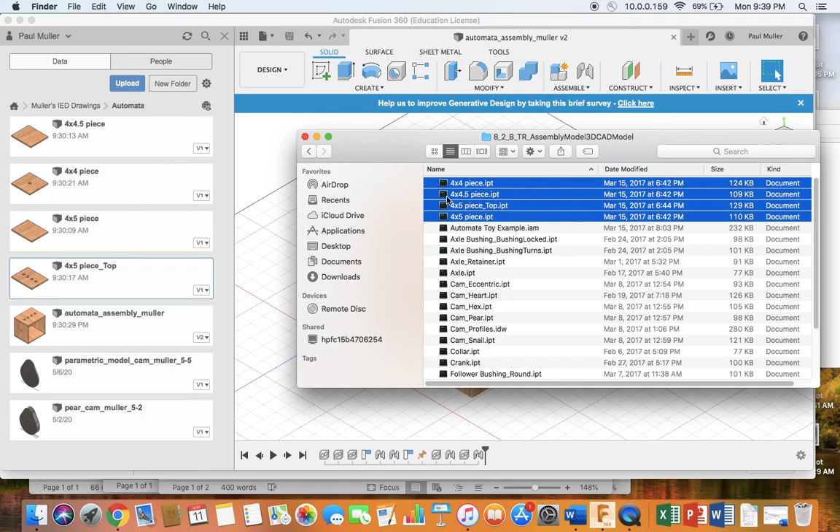Let's go back to Fusion 360. Once you've downloaded the 4 parts of the box, then you need to upload them by grabbing them from wherever they are, like here. I highlighted them all at once, and I clicked on upload. Then I dragged my files into this box. I selected the files, put them into my automata directory, and said upload.

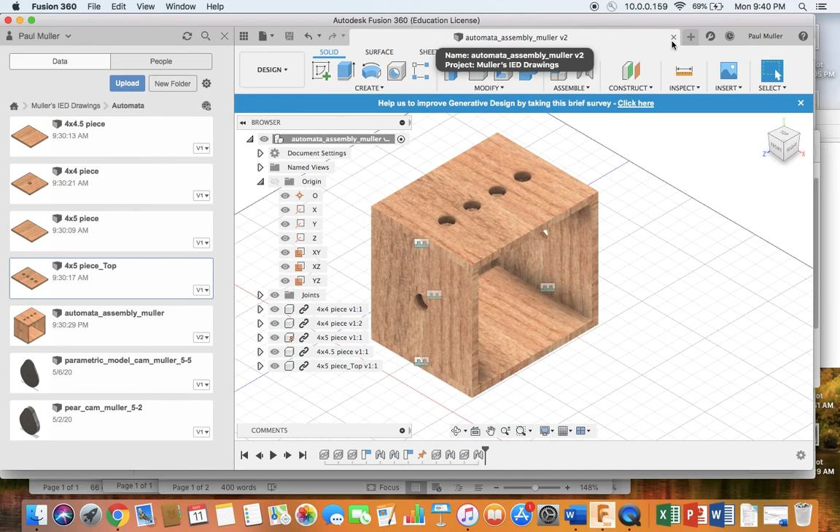Once you have done that, your files will be pictured here in the data window. Let's start from the beginning, so let's close this. I'm going to create a new file, new design.

What you're doing is you're going to move these pieces into this design. You're assembling these pieces, so what you need to know is that the 4x5 piece is the bottom. I'm going to start there. The 4x5 piece top, parallel and symmetric to this one, is the top piece, as is probably obvious. The 2 4x4 pieces are the sides, and the 4x4.5 piece is the back.

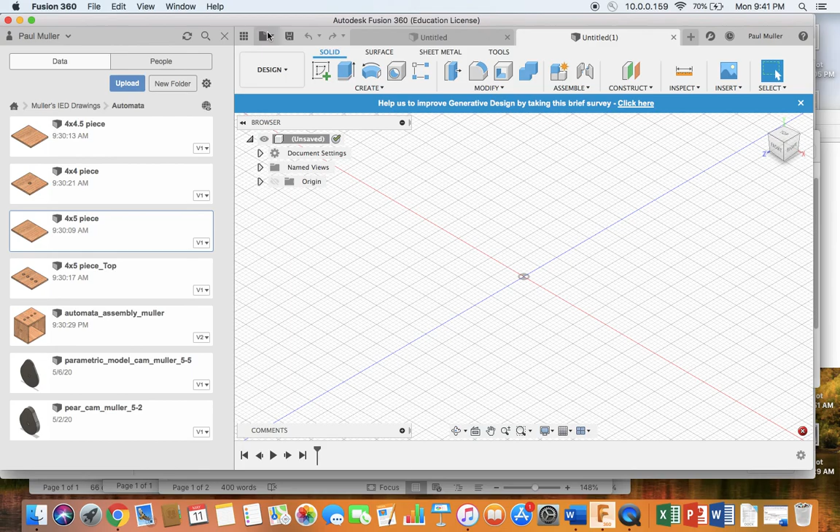Let's click on the 4x5 piece, that will be the bottom. I'm going to right click on it now, say insert into current design. All right, it's telling me I need to save this, which I thought I already did, but I guess I didn't. So you're going to call this something.

Please make sure it's in your automata folder. I would call it automata assembly, and then your name.

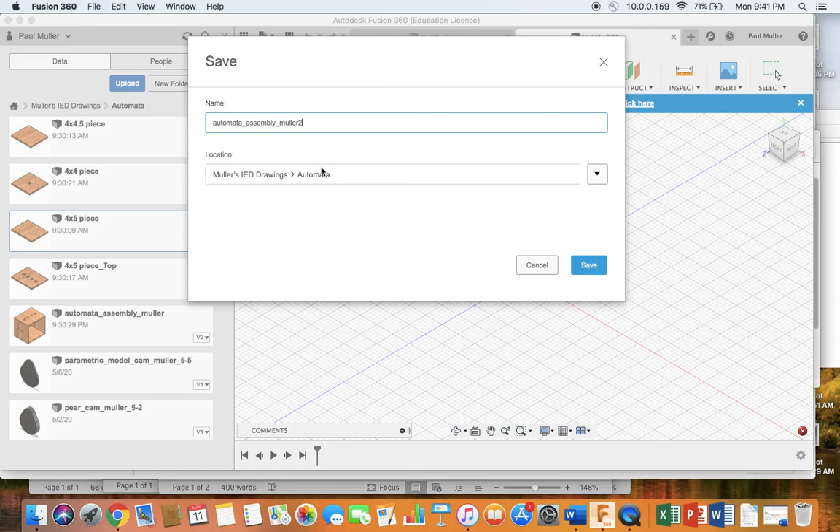Okay, so now that you have a saved design, click on the piece you want to start with, in this case the 4x5 piece. Now right click on it, click on insert into current design. This may not be the orientation that you would expect from the bottom piece.

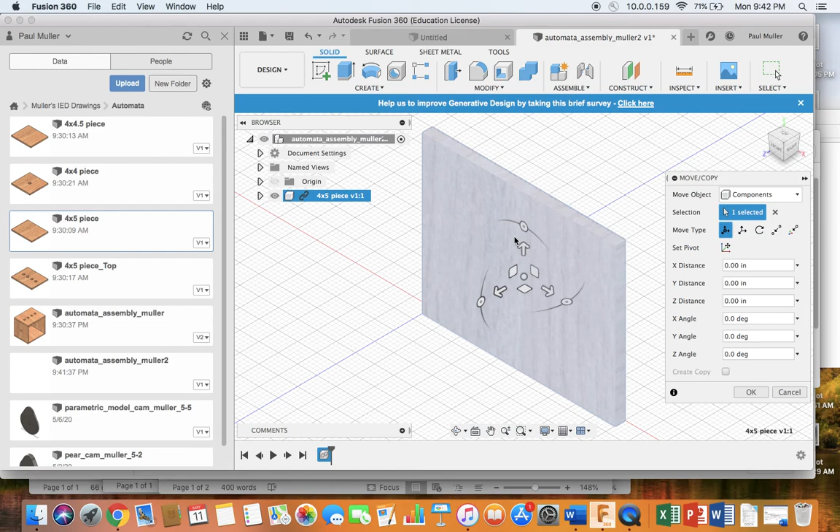You are given all these tools that are part of the move copy assortment. So it looks to me like I want to rotate this, right? You look at one of these 3 rotation directions, and it looks like this is the direction I want. So I'm going to rotate this in this direction, and you'll see that now I have an angle of degree here. Negative 30 is probably not what I want, it's probably 90. So type that in and hit OK.

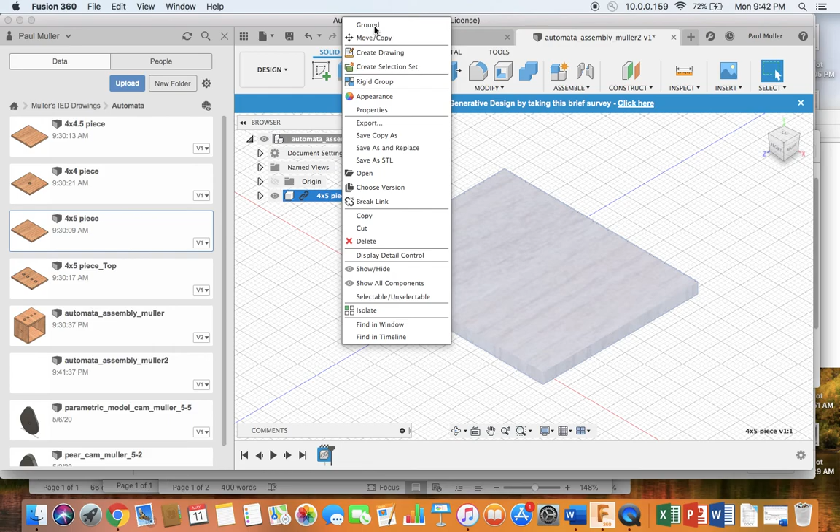Now I have the bottom piece. Over here, we can right click on it and click on ground. The reason for that is so that this piece cannot be moved, it's going to be stuck there, and then every other piece constrained to it won't be able to move. Let's just zoom out a little bit, and let's do that with another piece.

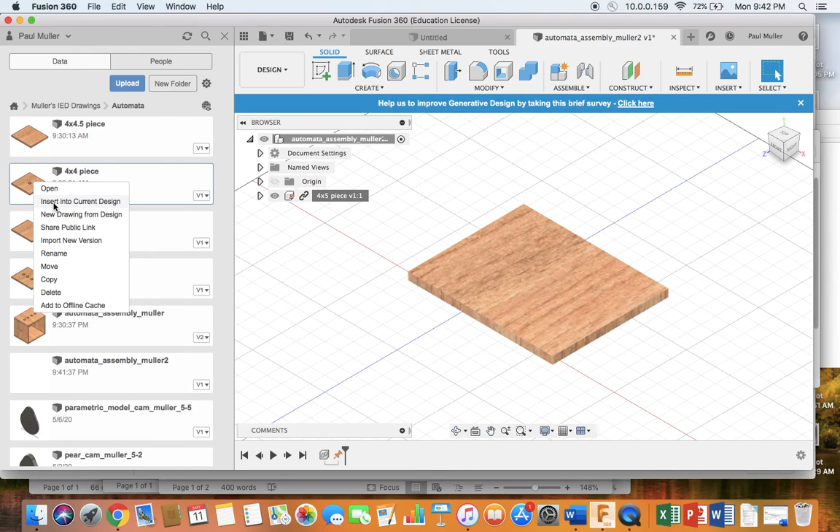So now we're going to do it with the 2 side pieces. For instance, I'll click on it and then right click, insert into design. Again, that doesn't look like the orientation. These 2 go onto the long ends of it, so I'm now going to rotate this by doing that. Doesn't look like a full 90 degrees to me, so I'm going to type that in.

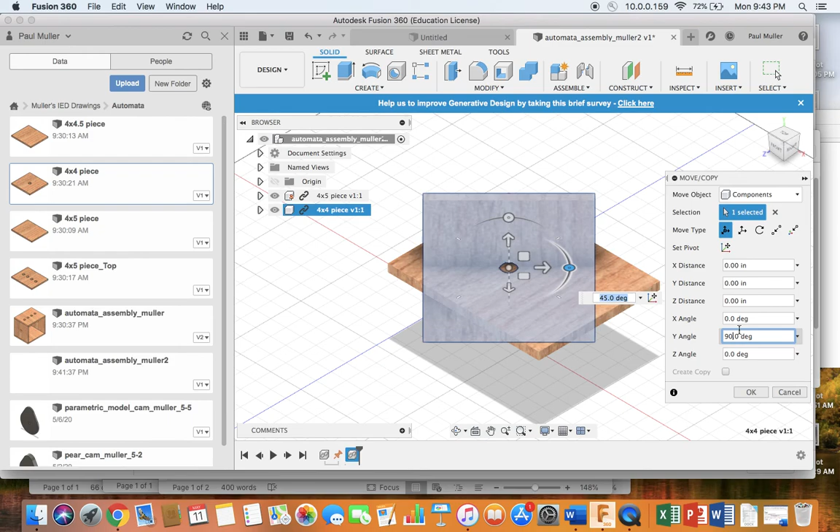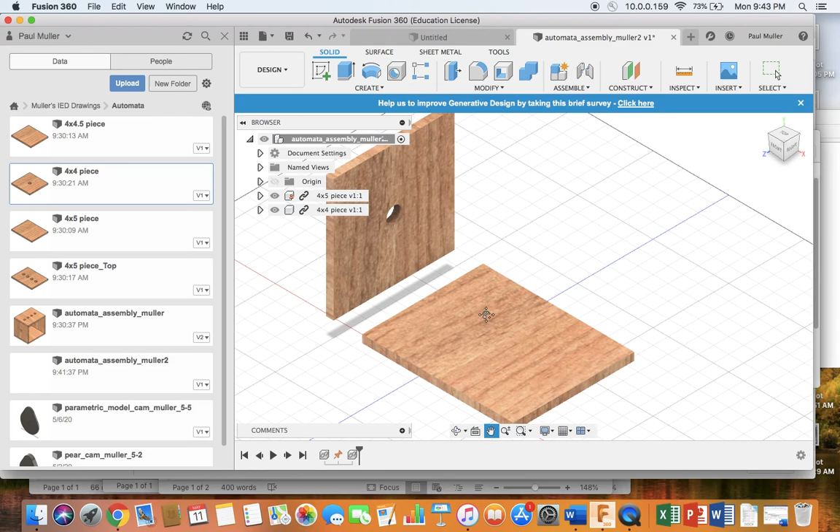You see that it did what I needed it to do. This circle in the middle allows you to move it in any direction, so I'm going to push it back so I can see some space between my bottom piece and my side piece. Now let's do it again. I'm going to escape out of the pan tool.

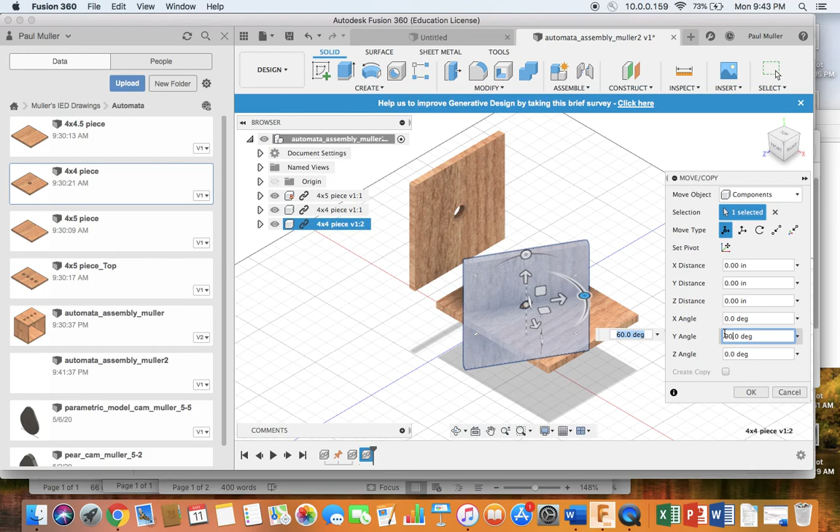I'm going to left click on the 4x4, now right click, insert into current design. Again, doesn't look like where I wanted it, so I'm going to grab the rotation tool, rotate it 90. Again, probably kind of in the way if I put it there, so I'm just going to put it over here so it's out of the way and then hit OK.

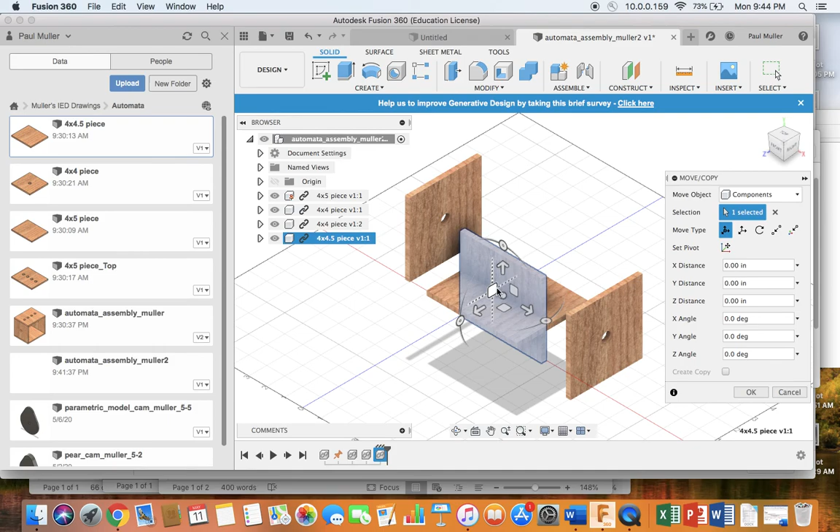All right, we have a few more pieces. Why don't we stick with that so it doesn't, well, we'll put in one more piece. We'll put in the back piece. I'm going to right click on it, insert into current design. And it looks like it's the right orientation, so all I'm going to do is go to the middle circular piece and just drag it. Hit OK.

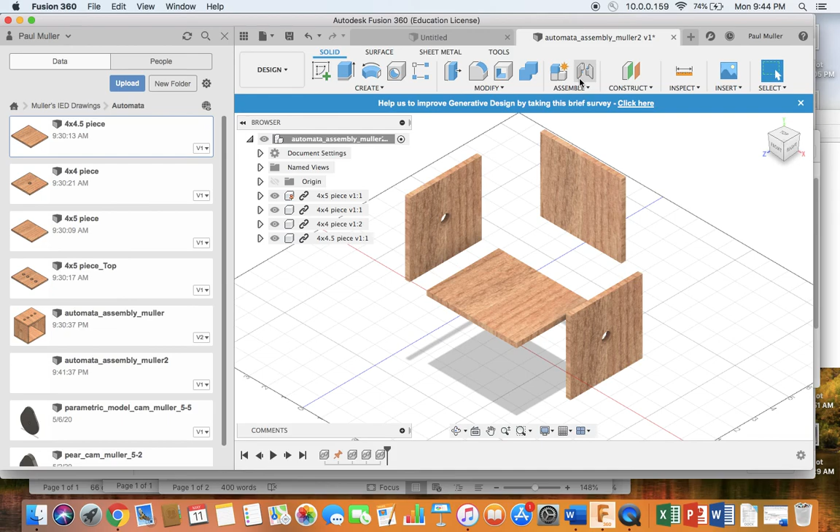Okay, so before I put in the top piece, which I think will just add to, make this more cluttered, let's now start to join these. So under the assembly set of tools, you could click on this arrow and then click on joint. Joint is for joining components, these are each their own component together to make an assembly.

You could use the as-built joint function if they were all already aligned, where the box looked like it was already put together. But we're going to use the joint command since they're not where they should be right now. That is also simply clicking on this icon as well.

All right, so what we're looking for is to join one corner of this, one edge of this, to one edge of the corresponding other piece. So let's zoom in a little bit.

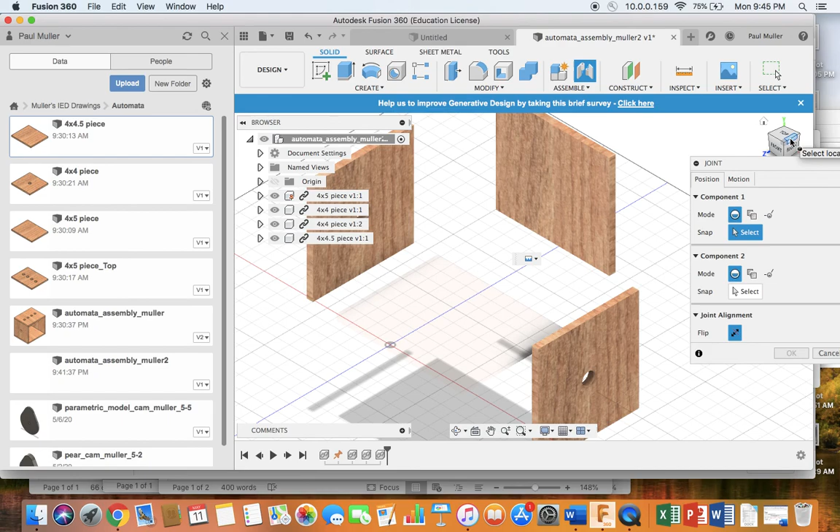You can rotate the view cube by just doing this. This is sometimes one of the better ways to do it. I like to find the edge that I'm looking at and see it in that orientation. Okay, so what you do is...

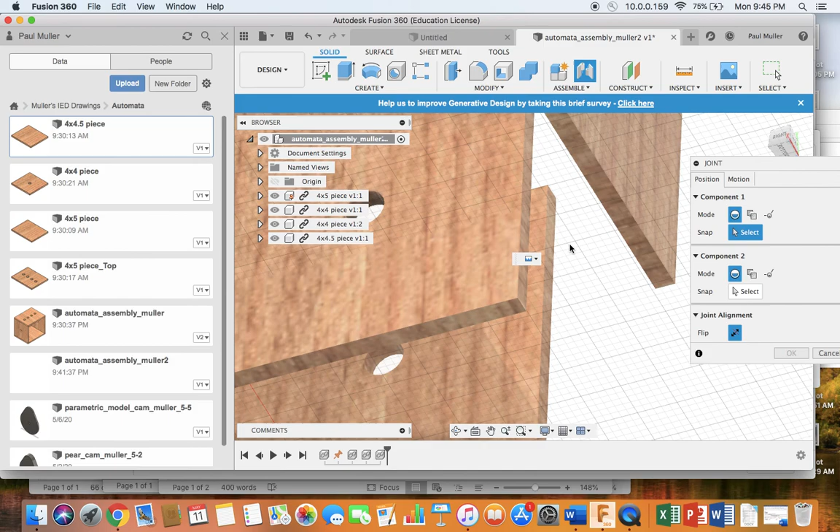When the wheel turns up here, let's grab the view cube and rotate a little bit. Let's give ourselves some more space. When it looks like there's a circular wheel here, it means it's grabbing the edge. Can you see the circular wheel where my cursor is? That means it's grabbing the edge of that face.

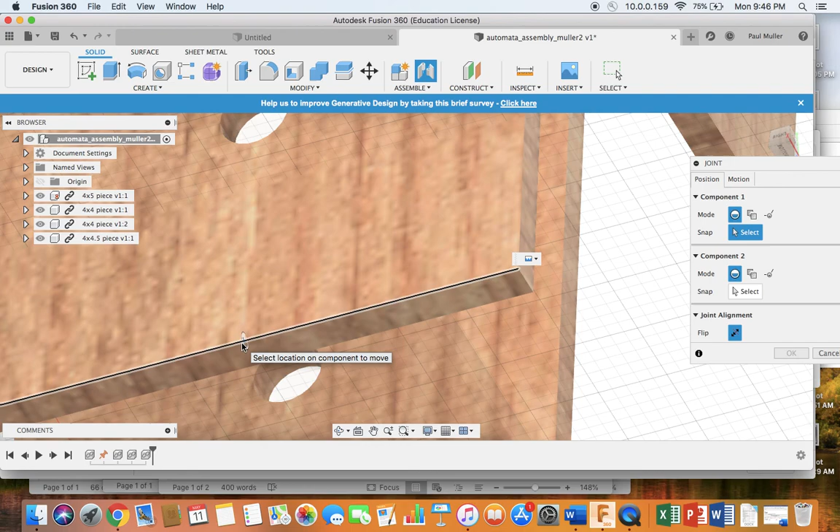So I'm going to hit the command key so that now I don't have to be perfect, and then I'll click. Now it knows that I want that edge. I'll zoom out a little bit.

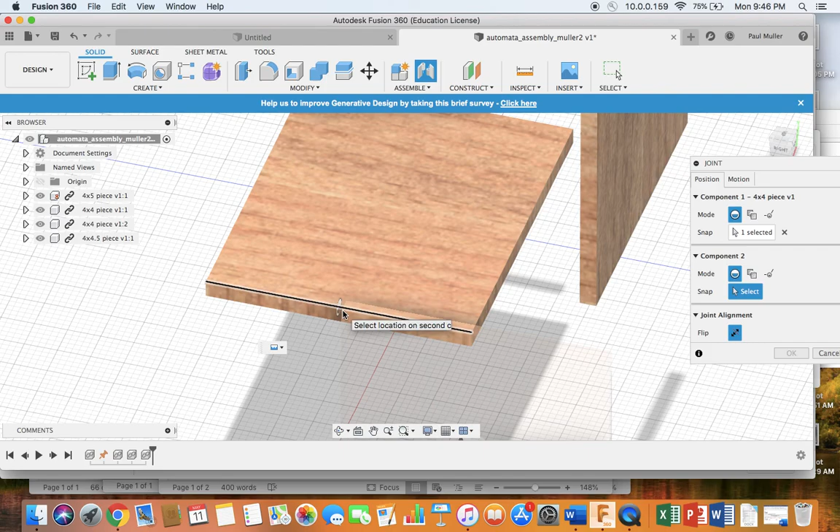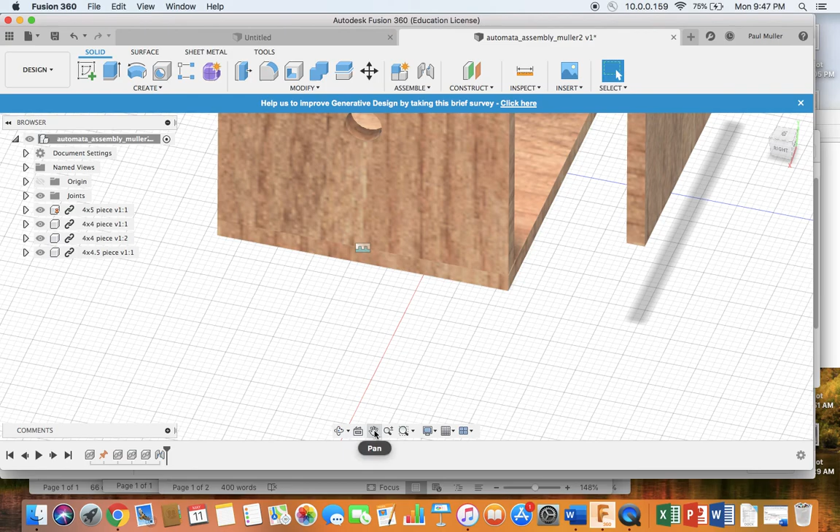I'm going to rotate now to see - it took away that side panel for me so I can see the panel I'm joining it to, the bottom. Let's zoom in. See how I'm again getting that circular wheel looking thing? I hit the command key, and that says, okay, I am stuck on the edge. I click again, and now the side piece has been joined to the bottom piece where the edges meet, and I hit OK. So a key thing is that you want the edges to join. I chose the middle of the edge in each case to join, and now the edges are joined.

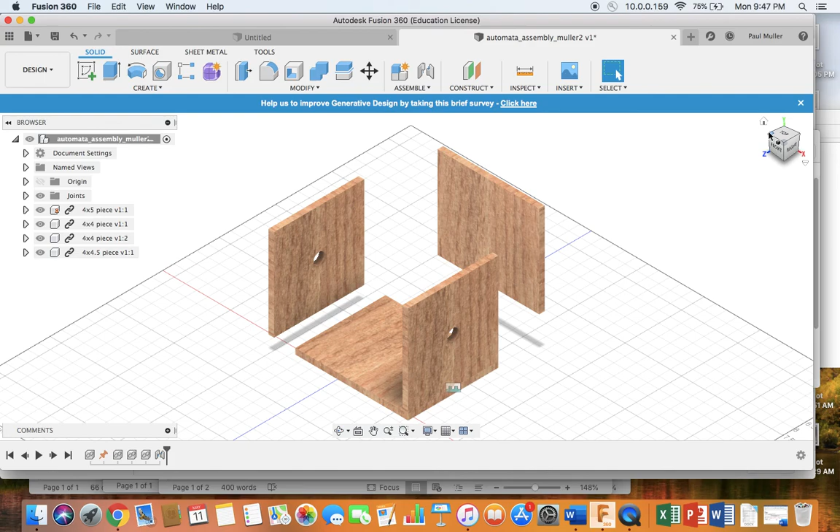Okay, let's try that on the other face. I'm going to escape out of the pan key. I'm going to click on the little house to give me a 3D view. Now I'm going to grab this corner and here, let's grab this and rotate it.

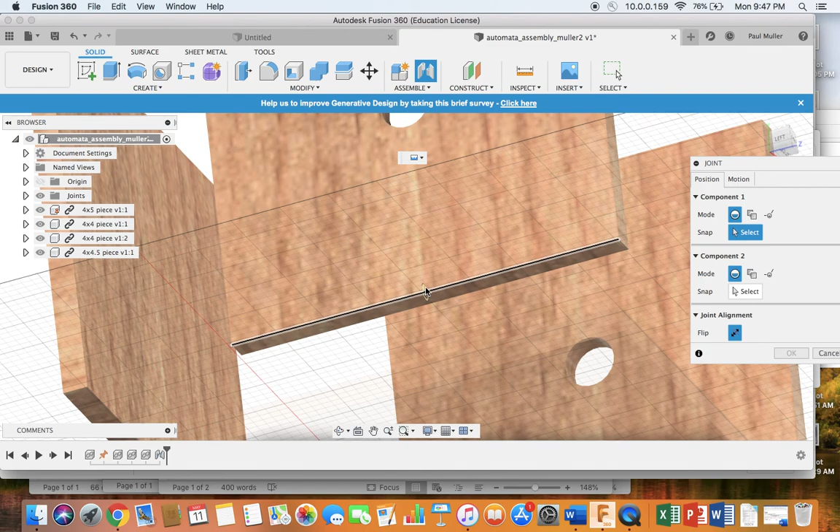Okay, so now I'm going to zoom in and grab the edge of this one. I'm going to come over here, find the joint function command. Again, I'm going to wait until I get that circular looking shape, and hit the command key so I don't lose it. Now again, the right side has disappeared on me, so I can see the bottom.

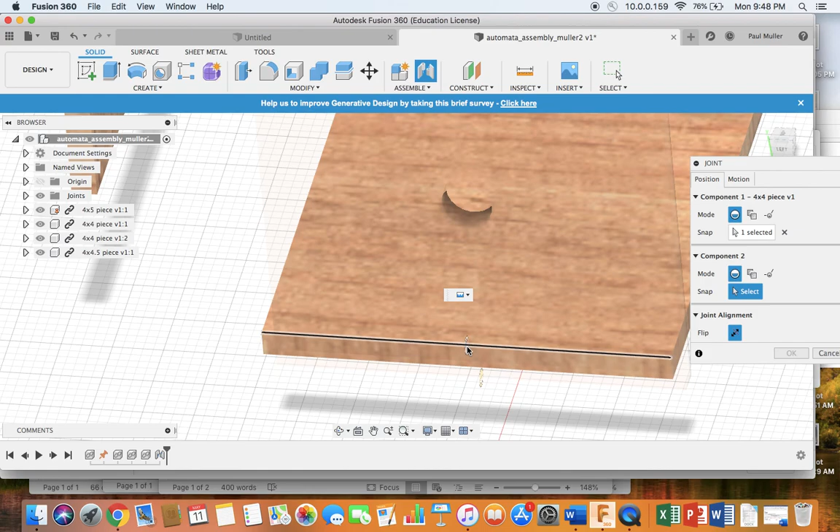I'm going to rotate this and pan over. Escape out of pan. Now I want to tell it what edge on this one. Do you see that I now have this little circular looking appearance? I hit the command key to lock it and click. Now the edge on the side panel will match with the edge on the bottom panel. I hit OK on the joint window, and I scroll out.

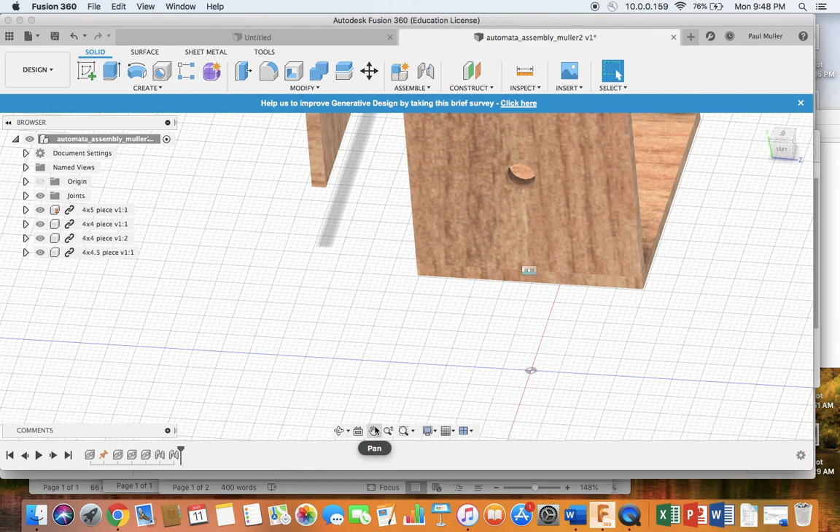Okay, so now we're going to put the back panel in. Escape out of the pan. Now we're going to rotate this. Okay, so we're going to join now this back panel's bottom edge.

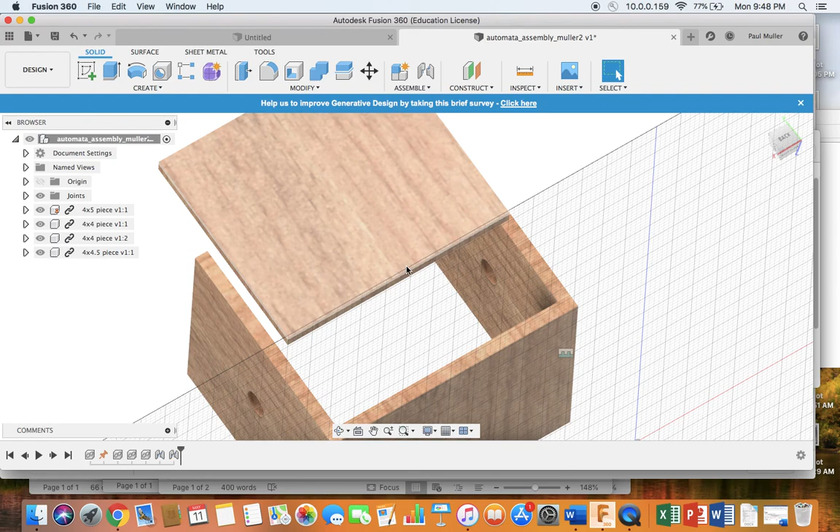So I'm going to click on the joint function again. I'm going to wait until I see the little circular appearance, hit the command. It gravitates to the center of that edge. I hit click. Now I'm going to grab the view cube and rotate down.

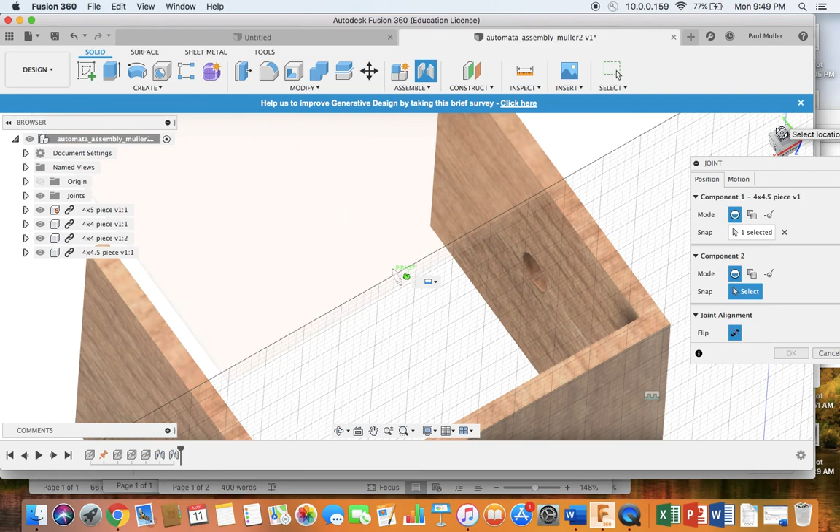I'm going to pan up. You'll notice the back panel has now disappeared, so I can see this bottom edge. Get rid of the pan. Now I'm looking for this - let's rotate this just a little bit so you can see it better. See, now you get this wheel looking thing.

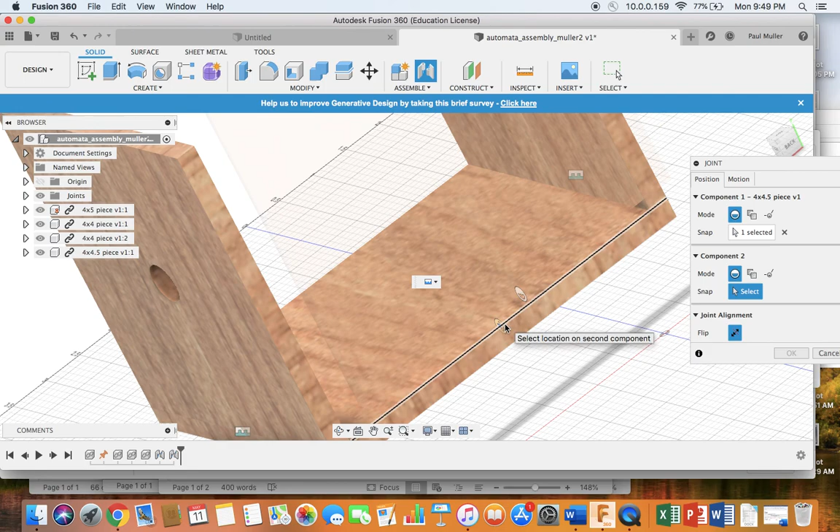I hit the command. It finds the center of this edge. I click. And now the back panel's bottom edge matches or joins with the top edge of the bottom panel. I hit OK. Now the other sides reappear. I zoom out and get the 3D view again.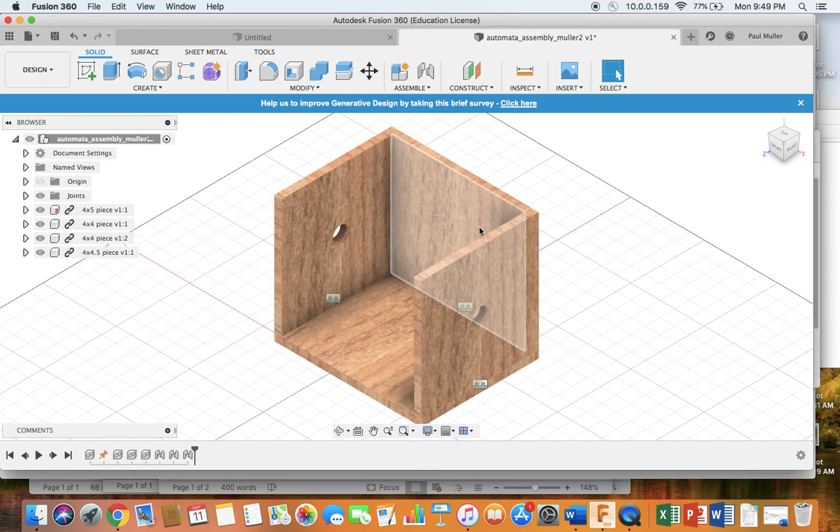All right, the only thing I'm missing now is the top. Let's go find our data panel again and find the top piece. I clicked on it. Now I'm right clicking, insert into current design. All right, that's not where I want it. I'm going to move it over here so I can see it better.

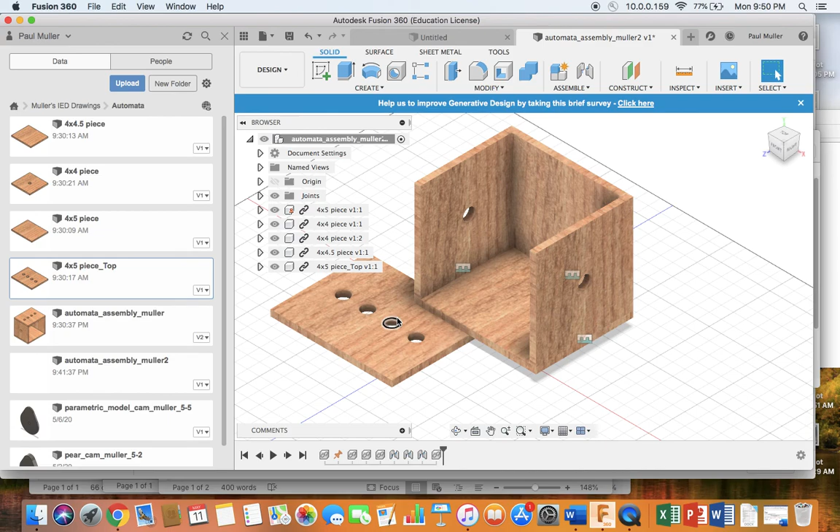I'm going to now choose one of these rotations. Looks like it's this one. Yes. Doesn't look like that's the 90 degrees that I wanted. I type in 90, hit OK. What I probably should have done, in fact, why don't I just redo that?

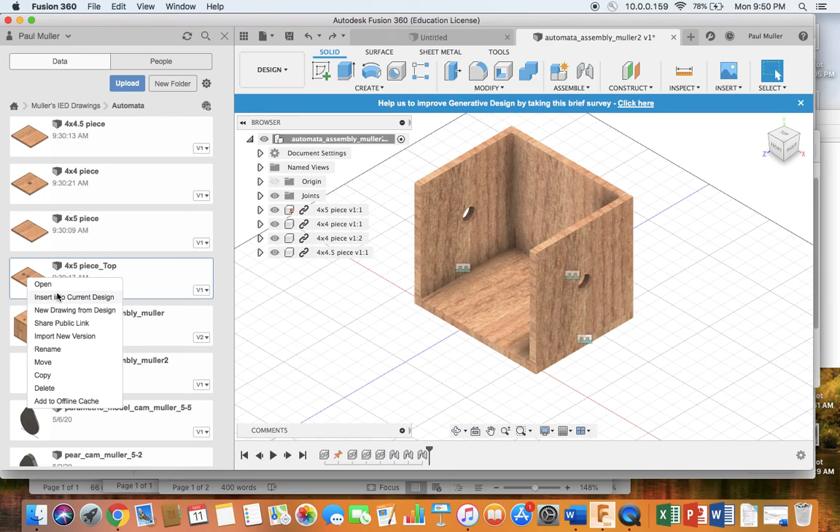Here, we'll just click on it and do the move copy command. Let's just undo it and do it again. I should have moved it up as well as rotated it. So maybe get it over here. Rotate it.

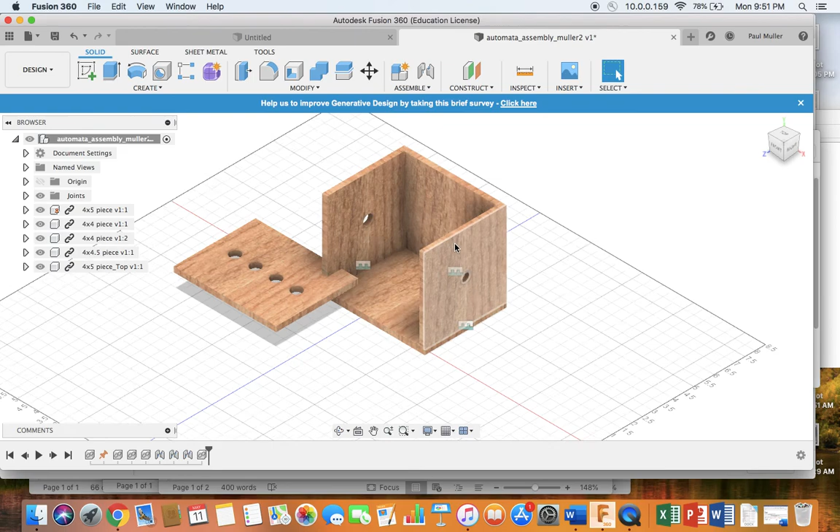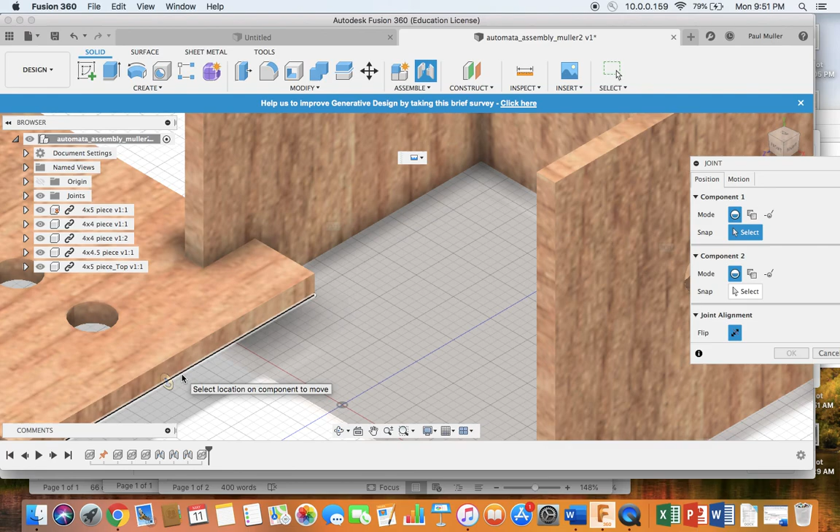Okay, so now I want this to sit on the top. Let's zoom in. So we're going to, again, click on the joint command. Try to find that bottom edge, hit the command key. Let's do it again. Find the bottom edge, hit the command key. Now it gravitates to the center. Click. The top goes away.

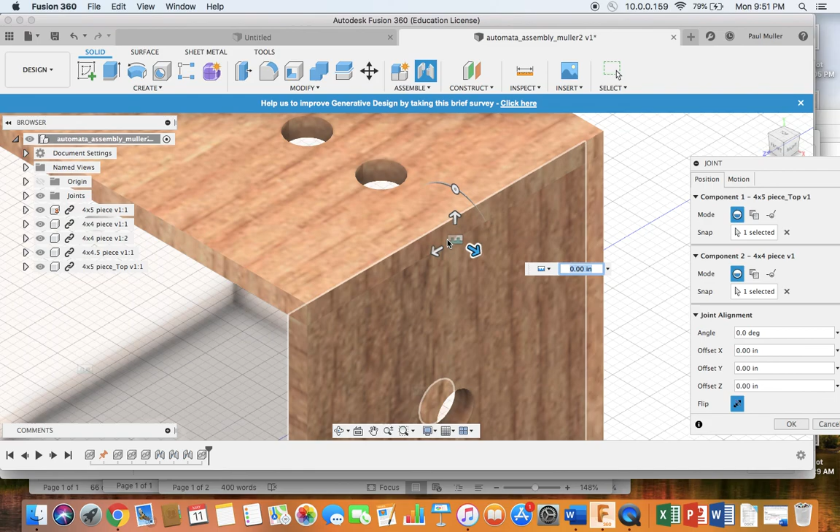Let's pan over so we can see this better. Find the edge. See, I get that circular view. Command key locks it in. Click. That shaking means that it's joined. Click OK. Let's zoom out.

And now you have a finished assembled automata box. Thank you for listening.